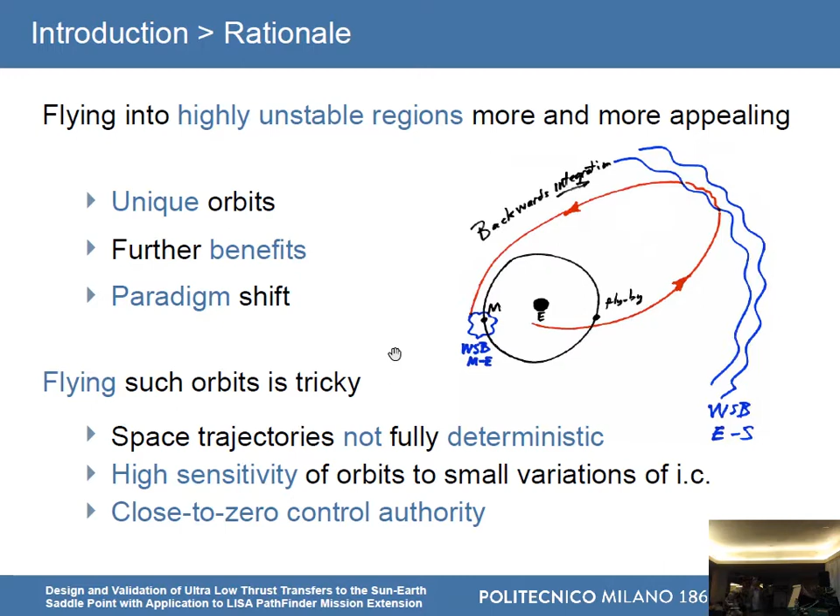Moreover, these kind of orbits are highly sensitive to small variations in initial condition, by definition, because they use a highly nonlinear dynamics. And as we will see in a second, in the present case, we had close to zero control authority, which means that we had very, very little control capability of our system. In this framework, there was a recent interest toward the saddle point.

A saddle point is a point where the net gravitational acceleration between a couple of primaries, for instance, the Sun and a planet, balance. This point has not to be confused with the Lagrange point, because in the Lagrange point you have a saddle point among the potential of one primary, the other primary, and the centrifugal force. In this case, it is a saddle point only in the potential given by the gravitational accelerations of two primaries. So this is not an equilibrium point. You can only perform flybys of this.

However, Lagrange points... Euler points. Excuse me? There are Euler points, not Lagrange points. Okay. Yes, the three collinear ones are Euler-Lagrange points, and the two triangular Lagrange points. Yes, thanks.

Anyway, because of their property of having zero background acceleration, they are ideal locations to perform a number of experiments. For instance, they are ideal locations to test possible deviations from general relativity. I don't want to embarrass myself talking about something I'm not expert in, but the idea that ESA wanted was to perform a test of MOND, which stands for modified Newtonian dynamics, because you need this level of acceleration.

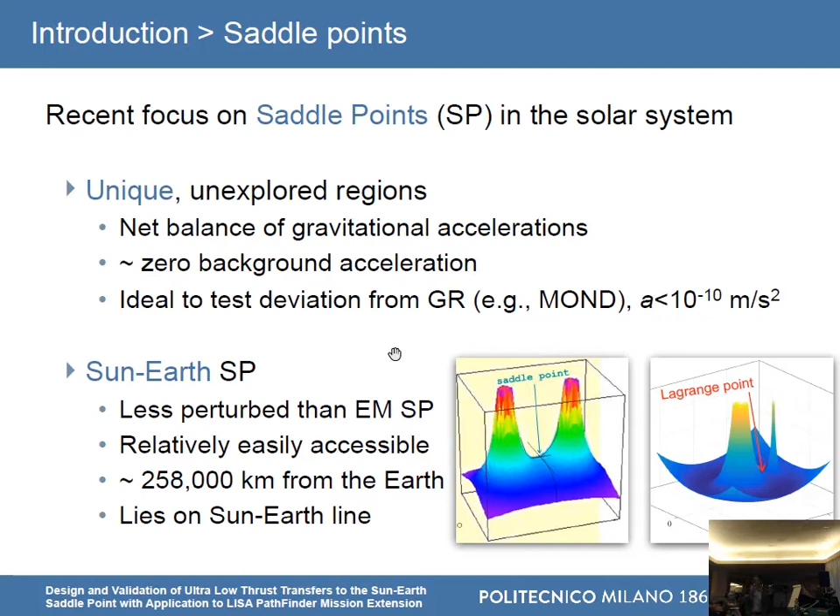For every Sun-planet system, there is one saddle point. The closest and the most reachable one is the Sun-Earth saddle point, which lies approximately 258,000 kilometers from the Earth, between the Earth and the Sun. So this means that the point is within the orbit of the Moon. To perform this kind of test, LISA Pathfinder was already in orbit until a few weeks ago, actually, and it was orbiting Sun-Earth L1 here.

The key point of LISA Pathfinder is that it has a very highly sensitive gradiometer here, made by two free-falling masses. And the idea was to use this precise accelerometer to measure the acceleration when flying through the saddle point. So the idea was, before disposing of LISA Pathfinder, to get from the Sun-Earth L1 to the Sun-Earth saddle point and perform this kind

of experiment. However, the only point is that this giant chemical module was ejected from the science module, which is this one, the yellow one, soon after the launch. And the only possible way to control the LISA Pathfinder trajectory was using these cold gas thrusters. These cold gas thrusters deliver 100 micronewtons of thrust over a 500 kilogram spacecraft, which means nothing.

The thrust to mass ratio in this case was 10 to the minus 7 meters per square second. Consider that whenever you have low thrust acceleration, usually this ratio is about 10 to the minus 4. So it's 3 orders of magnitude less than what current technology can deliver. And the total delta V budget here was around 1 meter per second. So we were performing mission analysis here with a total delta V budget of 1-2 meters per second. Usually you have kilometers per second when doing this kind of stuff.

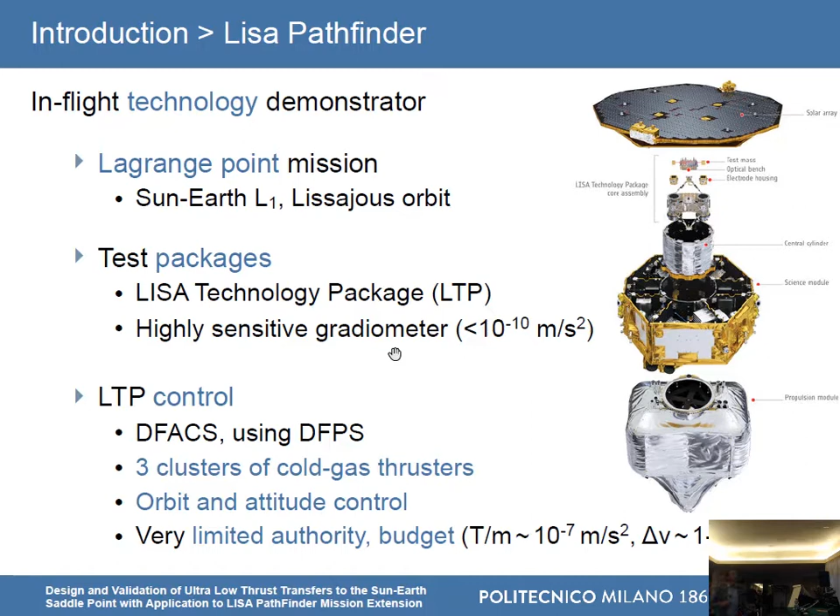So this tender was issued, and it was awarded to Politecnico di Milano and Dinamica, which is, by the way, a spin-off company of Politecnico di Milano that I co-founded a few years ago. And there were 2 parallel contracts. The other contractor was Airbus Defence and Space. The idea was to study low thrust, ultra low thrust propulsion with low delta V level with this kind of spacecraft, and how to accurately design and navigate in this region of space between L1 and L2, Sun, Earth, and Moon. This was the title of the contract.

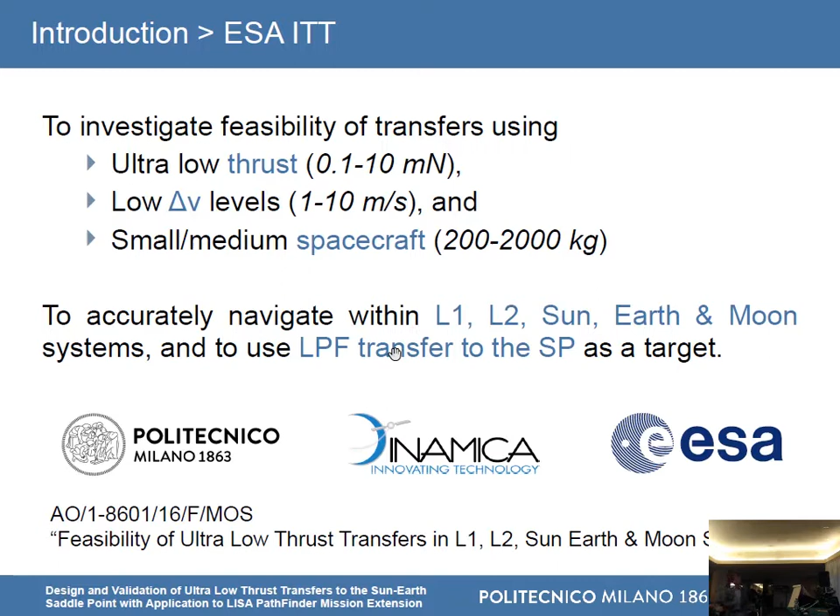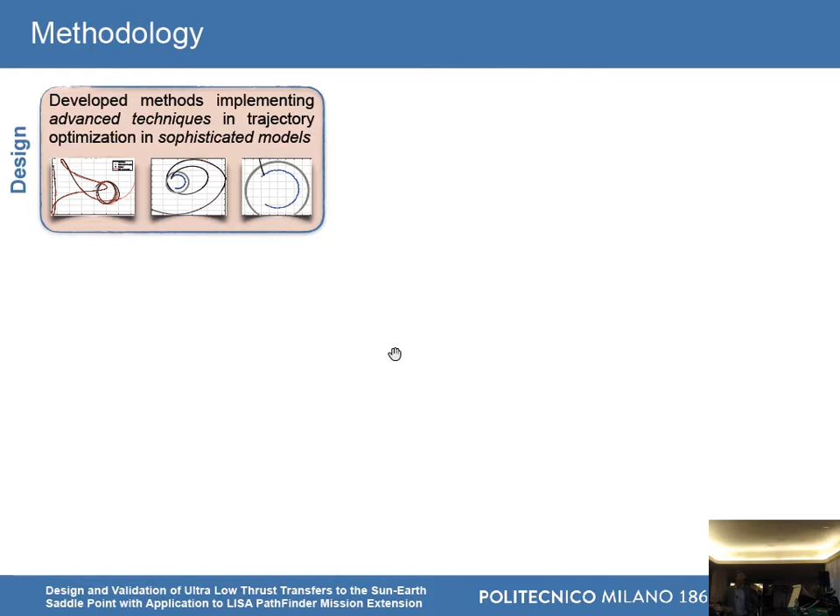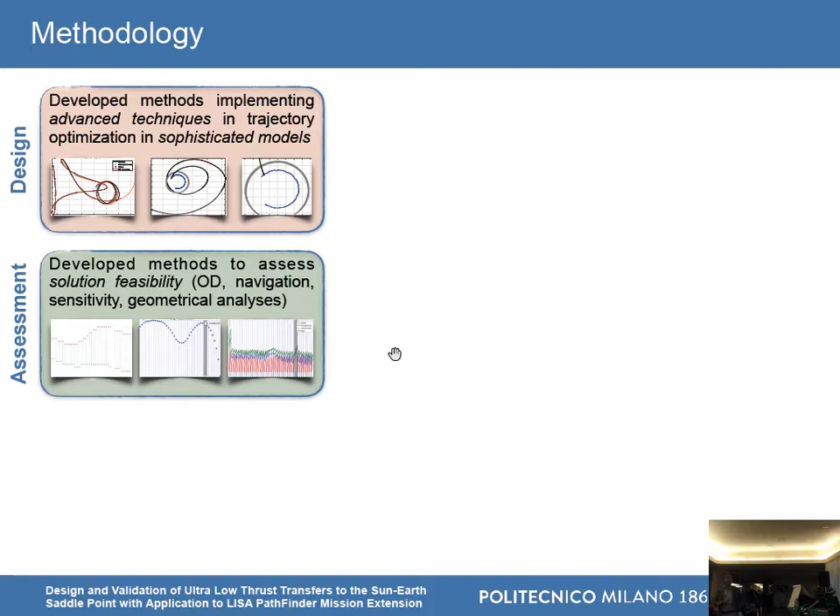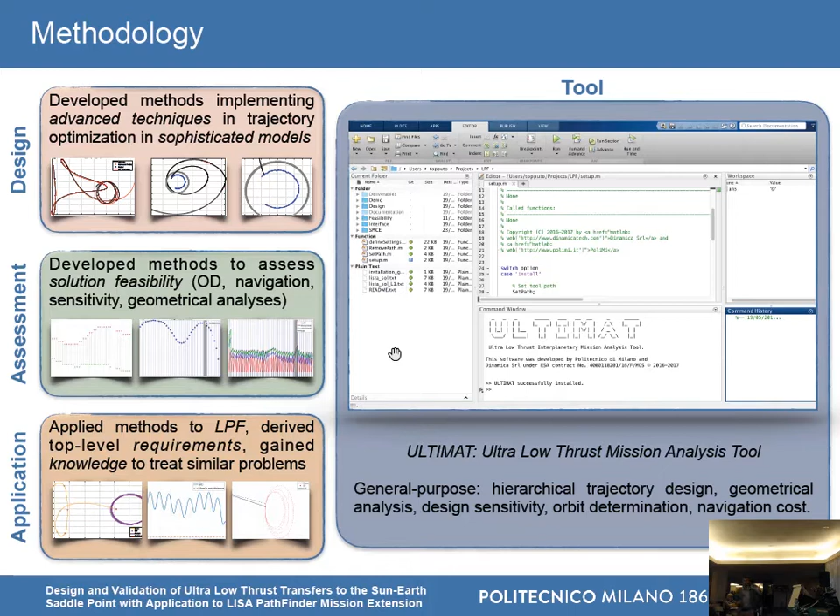So what did we do in this study? We divided the study into 3 main pillars. The first one was the design pillar, where we developed sophisticated methods to design this kind of transfers to the saddle point. Then there was a big part, which unfortunately I'm not talking about today, that was about the assessment, how we implemented navigation, orbit determination, sensitivity analysis, and so on, to validate the feasibility of this kind of transfer. And the third pillar was the application to LISA Pathfinder. As a byproduct of all of this, we ended up developing a general purpose software that does all of this. It's called the Ultra Low Thrust Mission Analysis tool, and it was delivered to ESA last week.

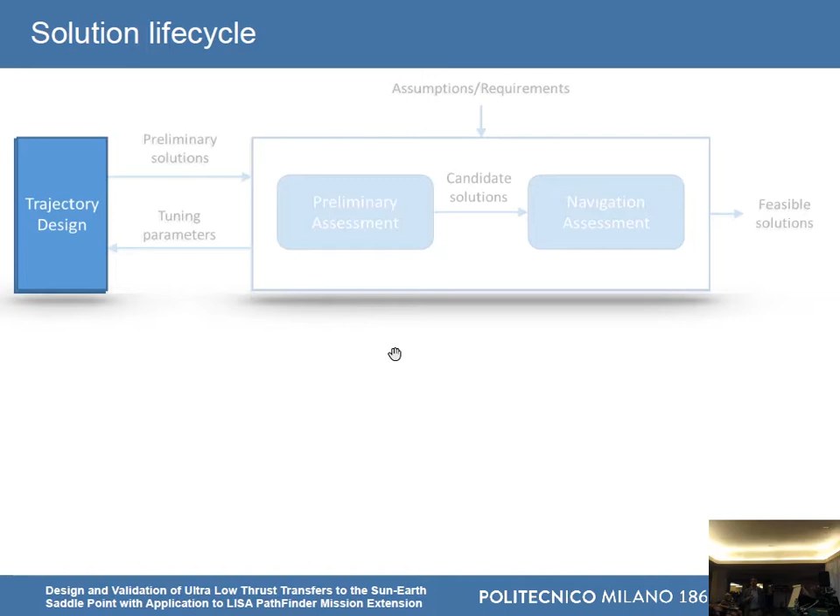So the solution life cycle here was to design the trajectories and have the preliminary solution. After the preliminary solution, perform a preliminary assessment, geometric and sensitivity analysis, to have candidate solutions, and then to accurately perform navigation analysis and navigation cost on these solutions to have what we call feasible solutions. Because of lack of time, I'm only talking about this block here, the trajectory design, which itself was subdivided into 4 more phases: exploration, optimization, finite-burn, and refinement.

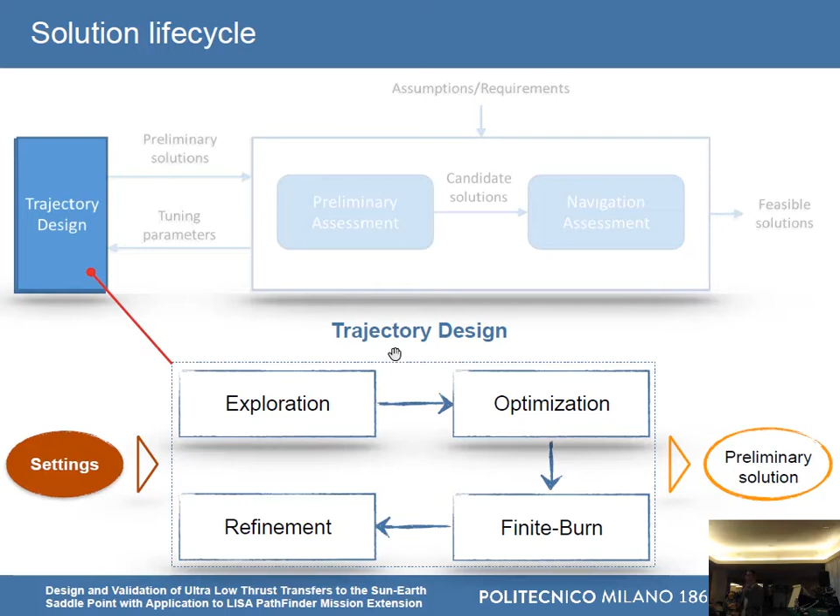Here we are talking about orbits that need to fly through the saddle point with high precision. The requirement was to hit a bubble centered at the saddle point with radius 50 kilometers. So the requirement was very high, therefore the modeling has been very accurate. The model that we used was our own implementation of the roto-pulsating restricted n-body problem. In this model we have the Sun, all of the planets, and our Moon, the planets with their barycenter.

Moreover, we have the solar radiation pressure and the J2, and this model is written in a frame that rotates with the Sun and the Earth, not uniformly, because in the real n-body problem this is not the case, and also pulsates to adjust the distances. This model was tested with NASA's GMAT with very nice results, and it's a full ephemeris model, therefore the positions of the planets are extracted from SPICE. So these are the equations of motion. Rho is the spacecraft state. C is a transformation matrix. K is a scaling factor, and tau is the independent variable here.

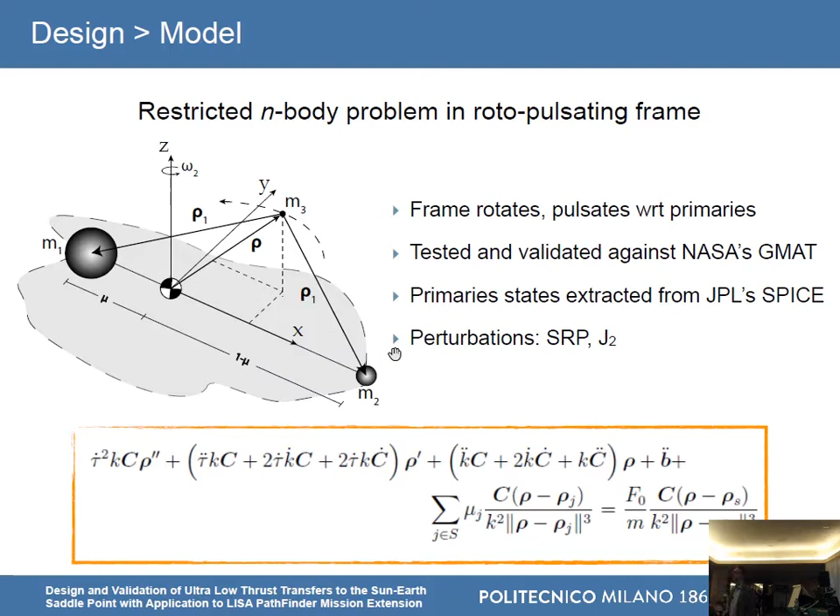In the exploration, the initial idea was to get familiarity with this kind of problem. So we performed a direct numerical simulation campaign to get familiarity with the problem and to understand the dynamics. So the problem is to go from this orbit. This is the Earth here at around 1. At 0 you have the Sun, and this is the equivalent of the orbit where LISA Pathfinder was. And we had to go from this orbit to this point here, which is the saddle point.

Okay, so we performed, as I said, a numerical simulation campaign, and by varying the out-of-plane amplitude of the Lagrange point orbit, the departure phase on the orbit, and the initial phase of the Moon, we were checking the saddle point miss distance, the time at saddle point passage, the number of lunar gravity assists, if any, the minimum distance with the Moon, and the time of the lunar gravity assist.

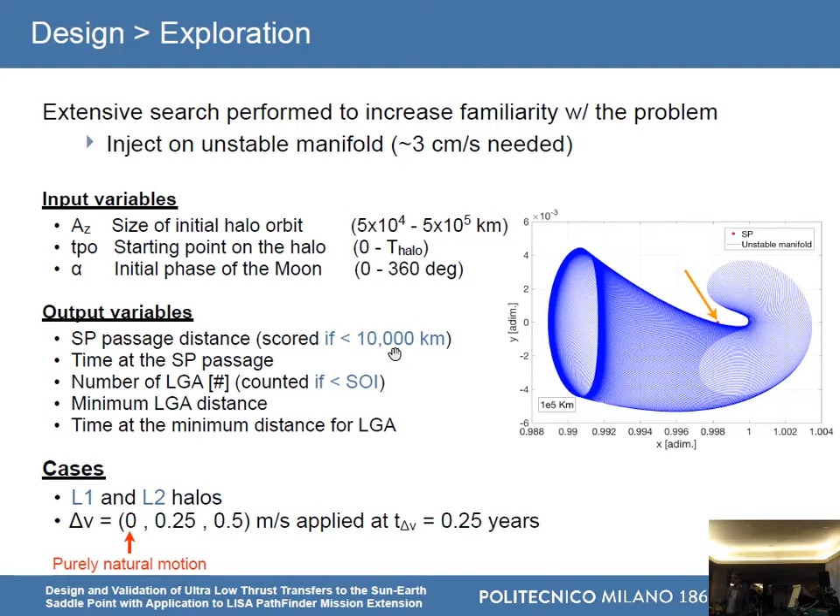This is because here we were already using the instability associated with this kind of orbit, because with only 3 centimeters per second you can inject the spacecraft toward the unstable manifold associated with the L1 orbit. And we were doing a number of cases. The most important one was to see if with 0 delta V, with 0 deterministic delta V here, we could reach the saddle point. So we performed a number of simulations.

Of course, here we have no time to show the results of a 1-year contract work, but here I'm showing one out of the 6 cases. For what concerns L1 and 0 delta V, we try to summarize the results in this scatter plot, in which you can see the correlation between the 3 input variables, out-of-plane amplitude, initial epoch, and time on the periodic orbit, and the output variables, which are minimum saddle point distance, time at the minimum saddle point distance, number of gravity assists, minimum distance at the gravity assist, and time of this.

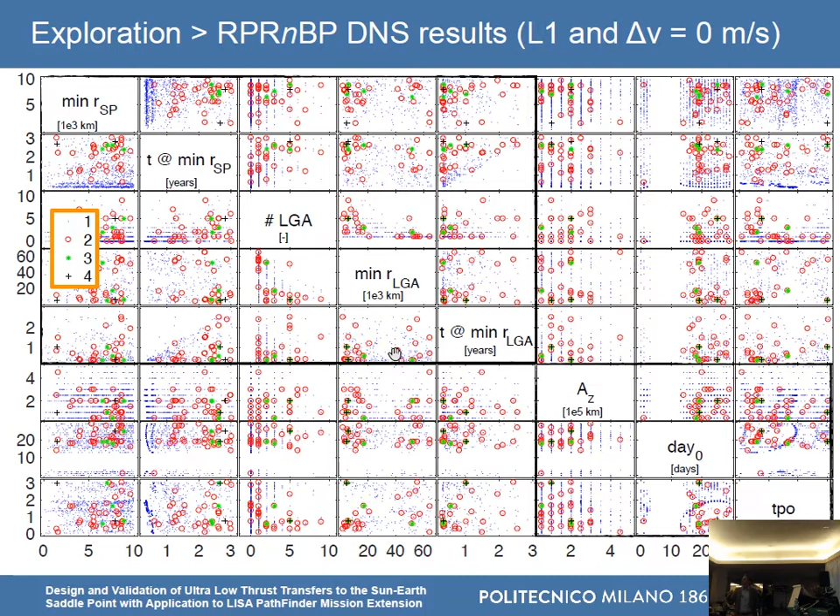And here the color code is that blue is 1 saddle point passage, red is 2 saddle point passages, and so on. This is because ESA wanted to perform 2 saddle point passages to avoid false positives. So here we can see a number of features. For instance, that many short-term solutions exist, less than 1 year to reach the saddle point. If you want to, of course, perform 2 saddle point passages, you need to wait a little bit more.

Many lunar gravity assists are not as important, because even with 0 lunar gravity assists you can get there. Of course, if you want to get 2 or 3 passages, you also need to account for a number of lunar gravity assists, but this is not strictly required. The solutions are spread all over the distances, because at the beginning we thought that you would need a very close passage to the Moon. This was not the case. What is important is to get the perturbation of the Moon, but not a strong deviation of the orbit.

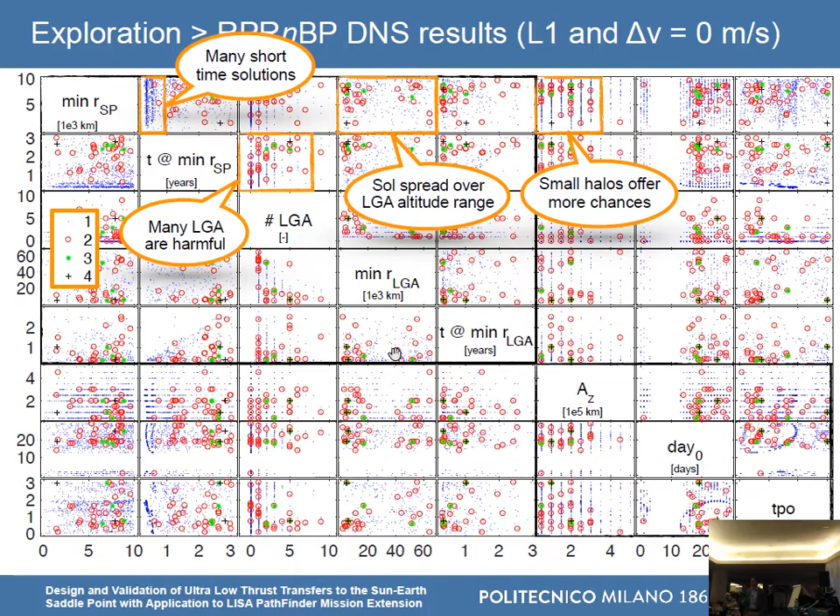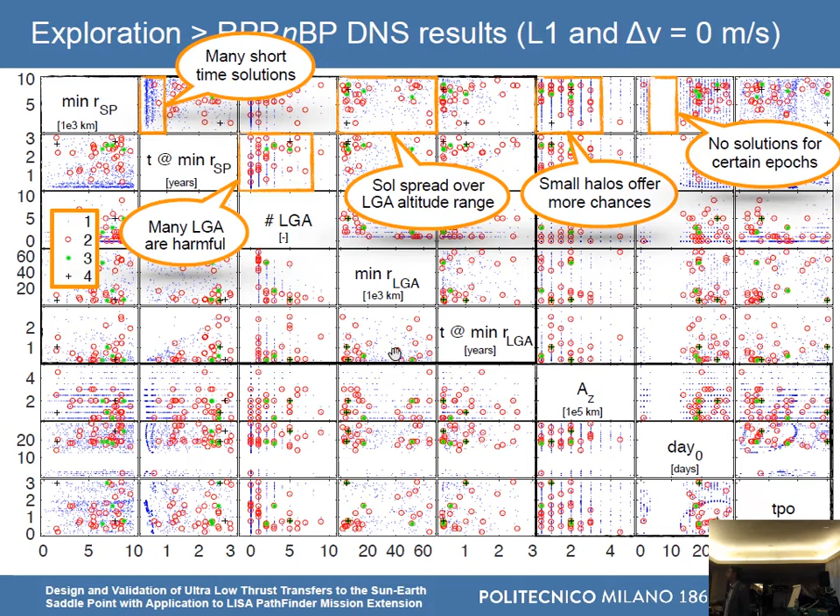And this is important because small halos, AZ is the out-of-plane amplitude. Small out-of-plane amplitude is better, because the less out-of-plane motion you have, the more chances you have to get to the saddle point, because by definition the saddle point lies in the ecliptic plane. And so on. The departure epoch, here we have a hole. The departure epoch plays a role, especially when you couple it with the phase on the departure orbit and the phase of the Moon. So you cannot arbitrarily leave this orbit at any time you want.

We performed this campaign in the circular restricted 3-body problem, restricted 4-body problem, and roto-pulsating restricted n-body problem. And we saw that the Moon perturbation enables some multi-saddle point passages that were not there, and also increases the chances to have a passage to the saddle point. In general, in a high fidelity model, passage to the saddle point is a little bit less likely than in the 4-body problem.

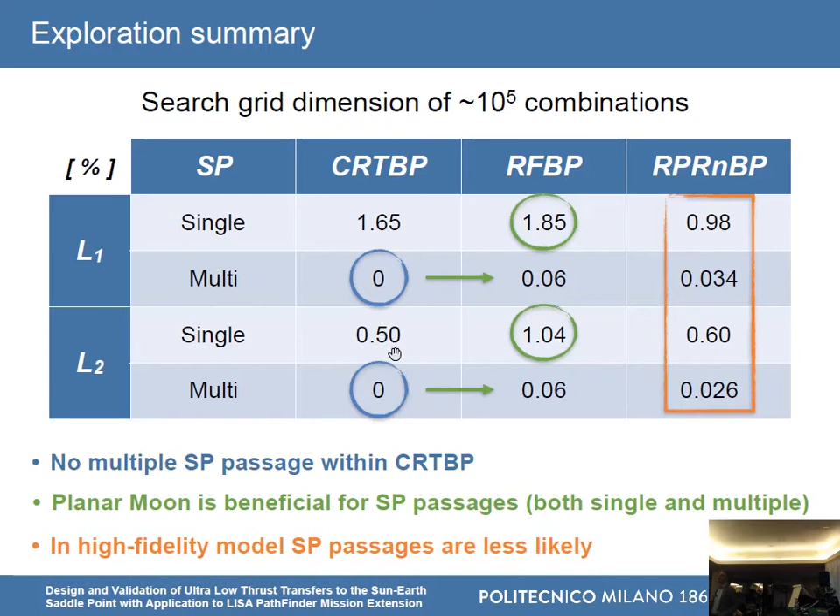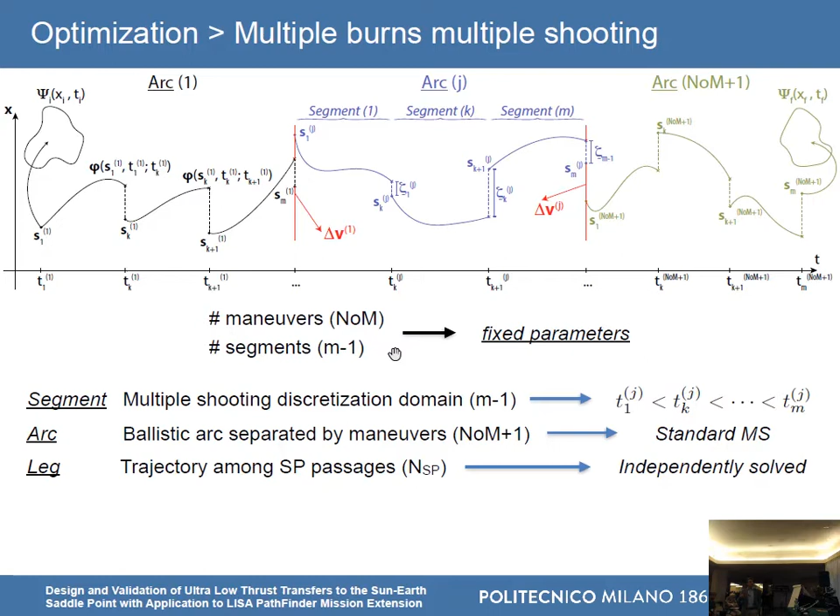So these were solutions that only passed through the saddle point with less than 10,000 kilometers distance, but the requirement was to hit the saddle point with many orders of magnitude less. So what we did, we used this as a preliminary solution, and then we ran a full trajectory optimization algorithm. So we implemented multiple burns, multiple arcs, multiple shooting, and we had a number of maneuvers divided into segments and so on. This was transcribed with the variables that are the states at each node and the times.

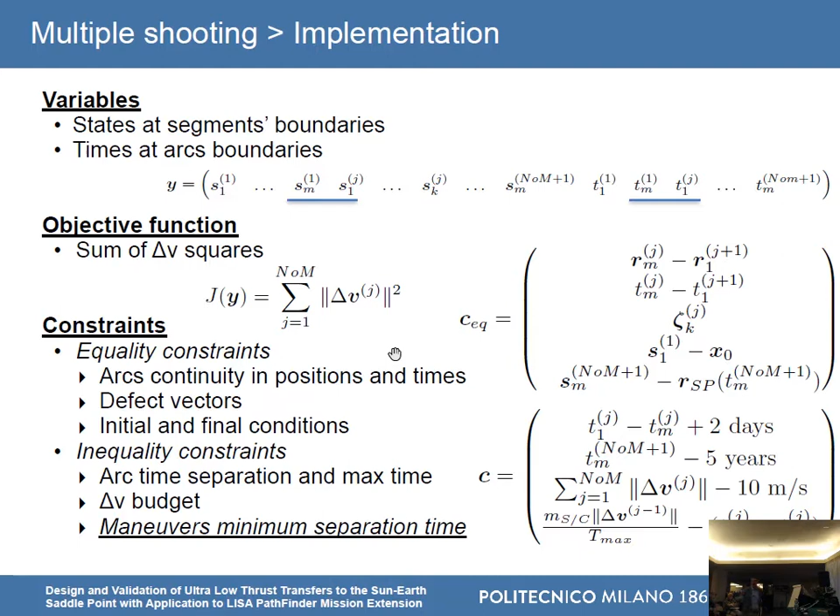The objective function was the square of the delta V, and then we had a number of equality and inequality constraints. Worth mentioning is the last inequality constraint, which accounts for the time needed to spread the delta V over a finite-burn arc, because this was already accounting for the next phase. These are examples of solutions from here. These are two passages from here.

You have a number of arcs here, and you have first and second passage. Here is another two-passage solution, but in any case, the delta V was already high, 7 and 9 meters per second in this case. So because of this ultra-low thrust propulsion, 1 meter per second can be done with this kind of thrust to mass relation by thrusting for almost 6 days. Okay, so impulses are not accurate enough in this kind of model, so we need to spread the delta V into a finite-burn maneuver.

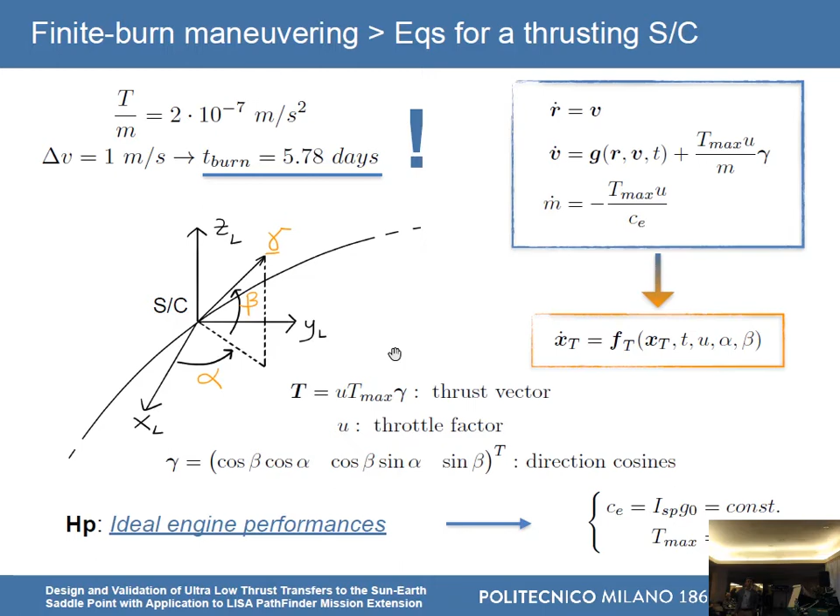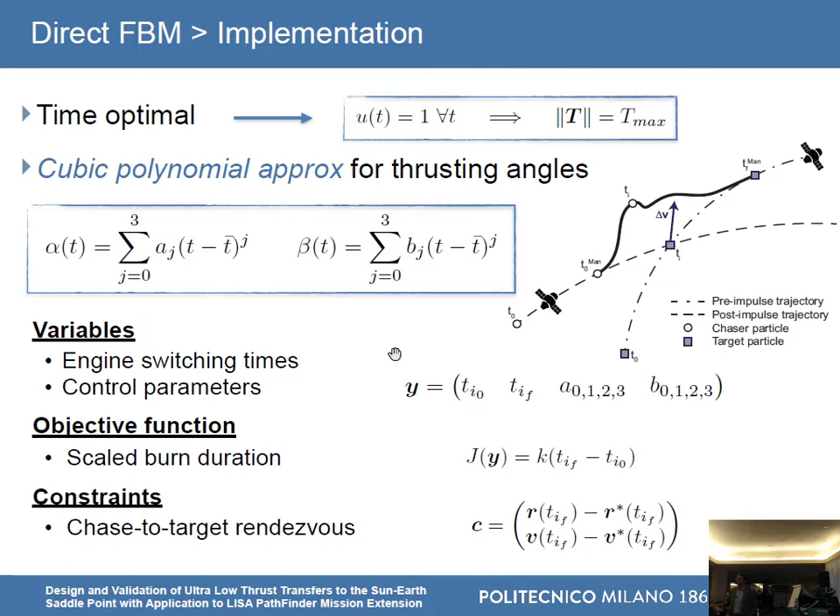So we have this continuous thrust formulation where you have T maximum, throttle factor, thrust pointing angle, and the spacecraft mass, and also in this case you have to account for mass variation of the spacecraft. If this is the orbit before the impulse and this is the orbit after the impulse, the idea was to find the initial time here and the final time there, and a certain thrust pointing history such that if you start thrusting here, at some point you will get the same orbit as in the post-impulse case. And this was a problem of finding 2 times and 4 times 2 coefficients, because we used third-order polynomial representation of this. And these are finite-burn solutions.

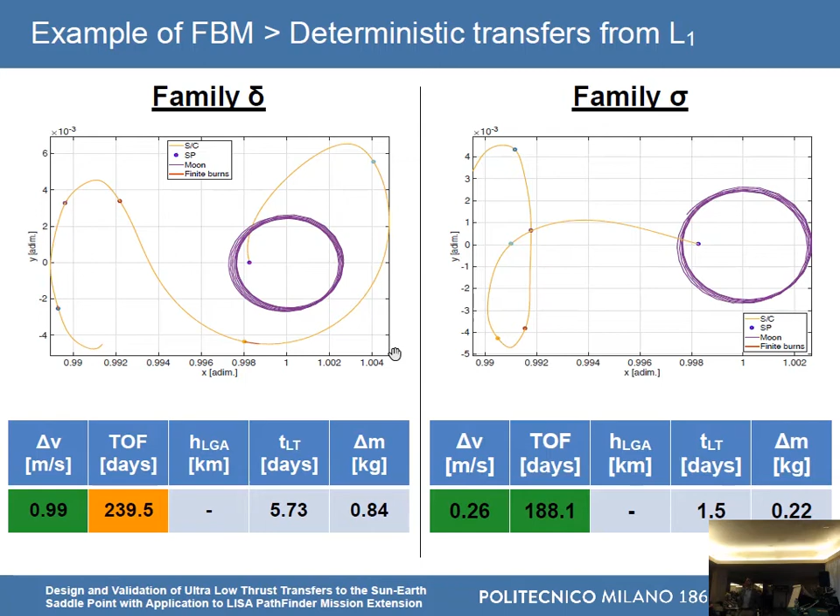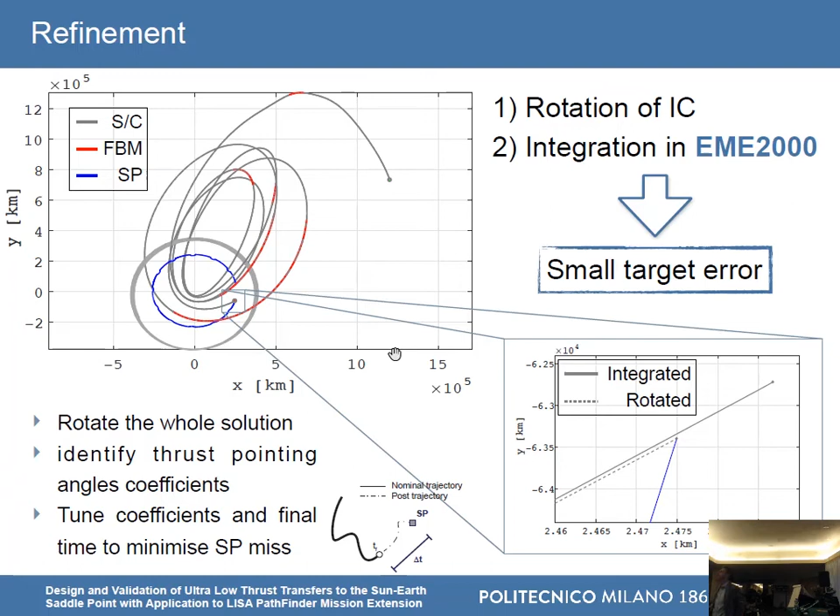So we implemented another module called Refinement, because for implementation issues we had to do all of this in the EME2000 frame, but when rotating the initial condition with a slightly different right-hand side, which models the same effects, the saddle point was missed a little bit, so we performed an identification and a tuning of the angles to get a precise hitting. Out of all of the direct numeric simulations that we ran, we found 39% of solutions which are good candidates, and from L1 and from L2 only 10% of solutions.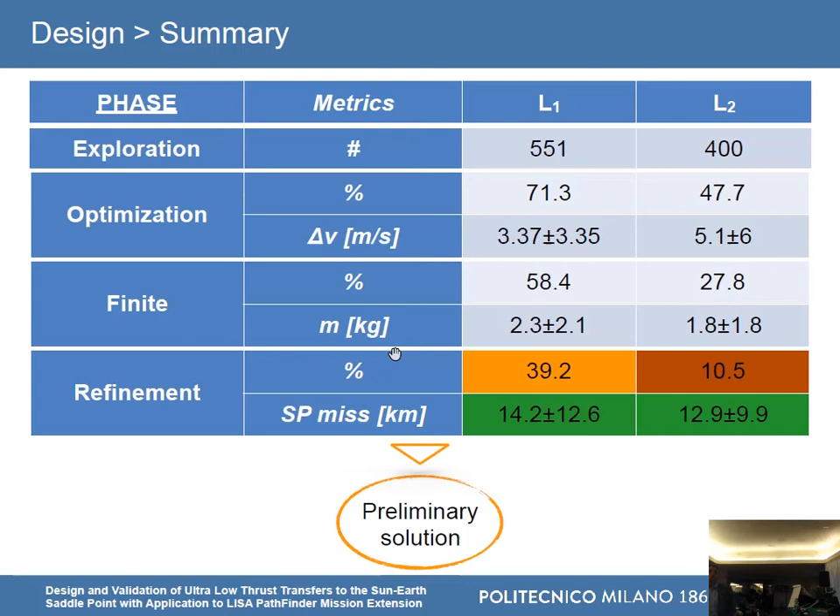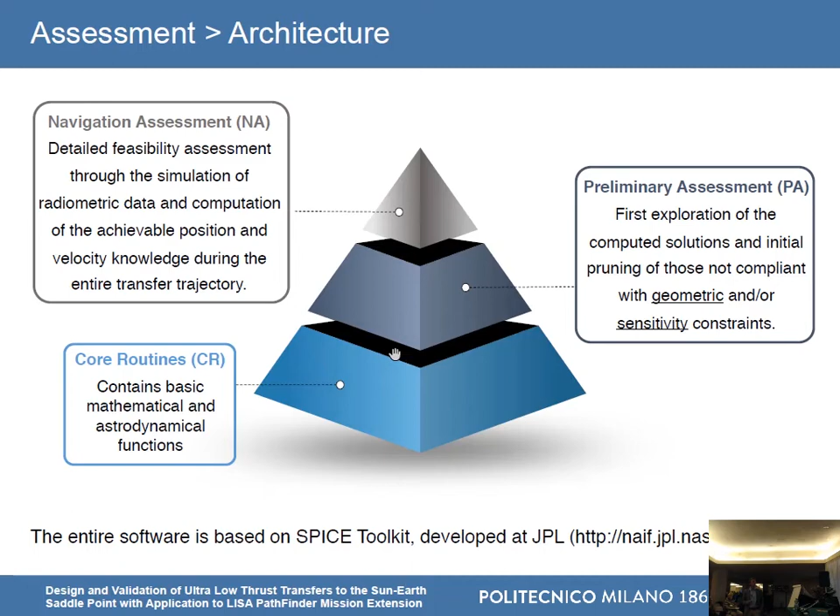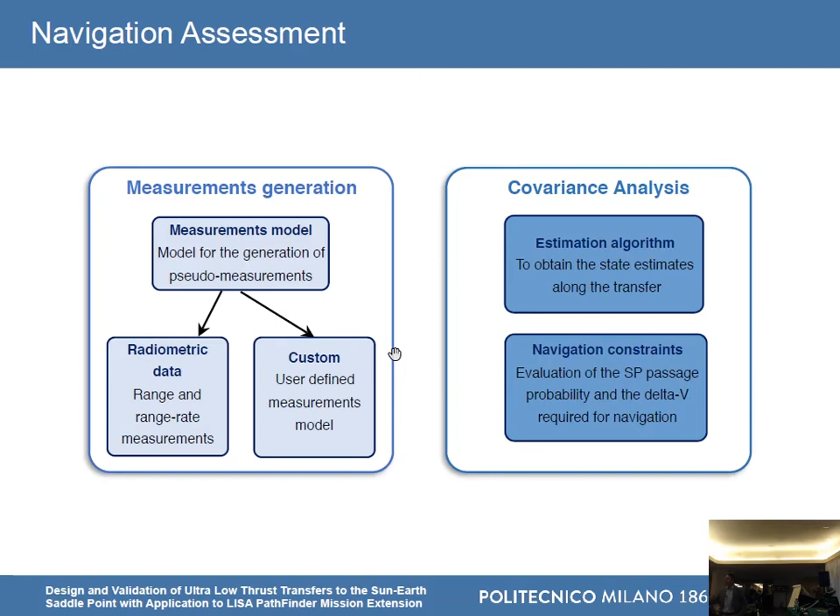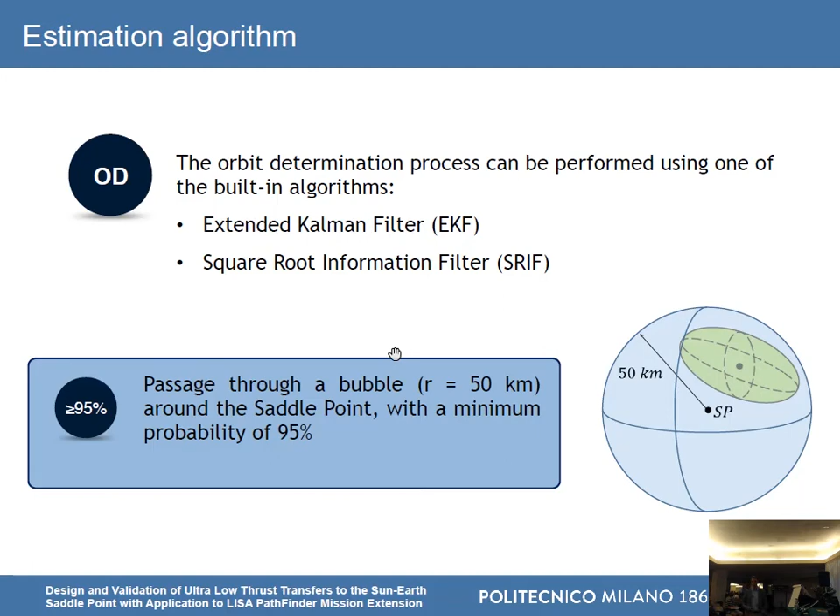Then we had another big block of work, which I'm not presenting unfortunately because of lack of time, but the idea was to assess the feasibility of this. So we implemented knowledge analysis, sensitivity analysis, to understand also how much it costs to navigate on this kind of orbits. After the knowledge analysis, this was your nominal state, this is your dispersion here, this is the saddle point, and this is a sphere of radius 50 kilometers. The transfer is feasible because this is a 95% ellipsoid probability. If this is inside the sphere, then it means that it is feasible, and this is what we did.

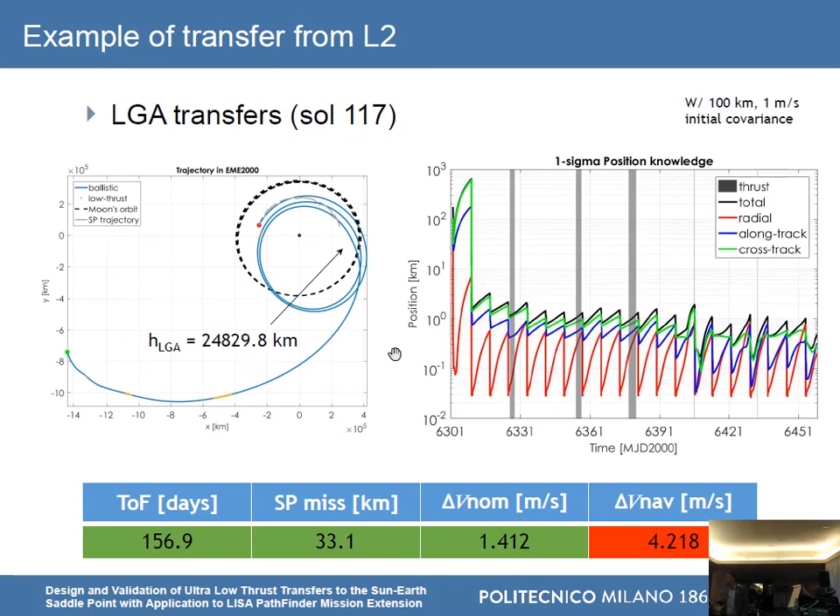So this is the knowledge analysis. This is how the position knowledge evolves when you have the transfer. These are the thrust arcs, and whenever you see the lines that go down, it means that there is a measurement done by the ground station. So we also implemented the radiometric measurements and the orbit determination cycle.

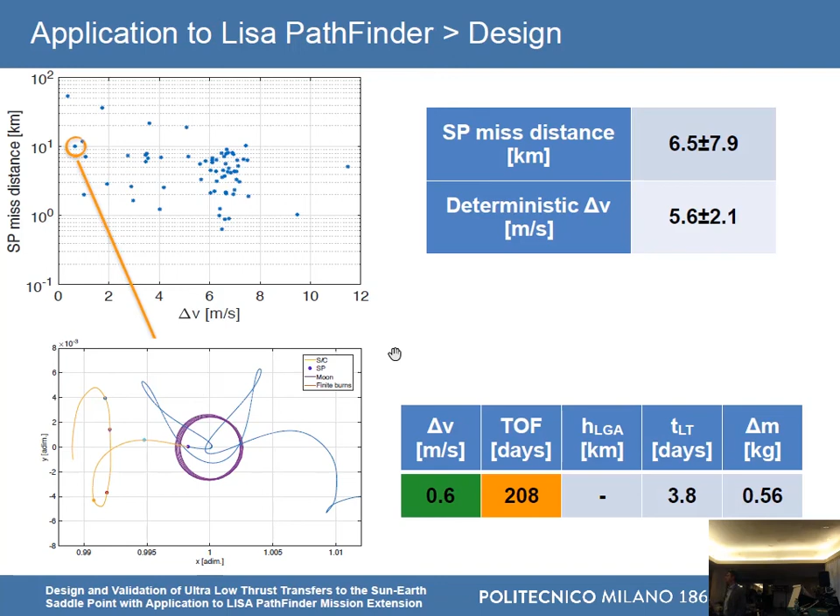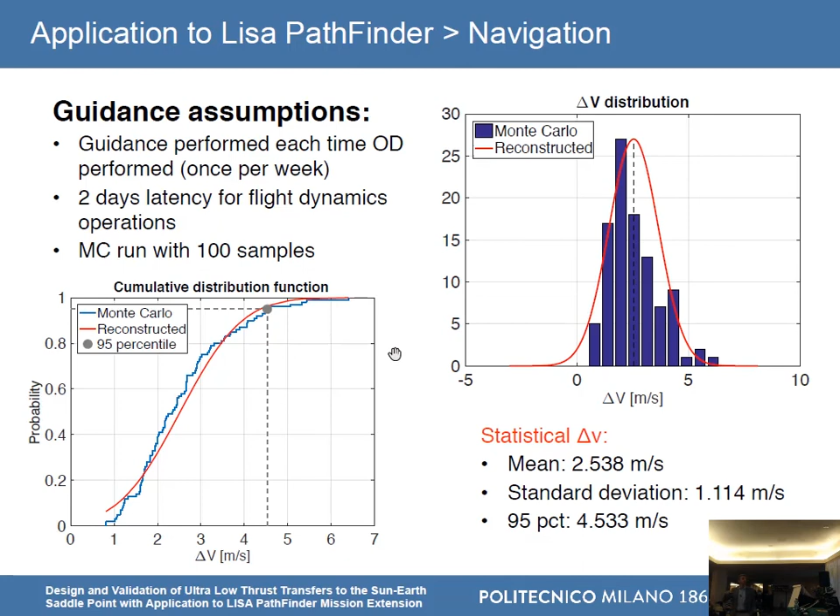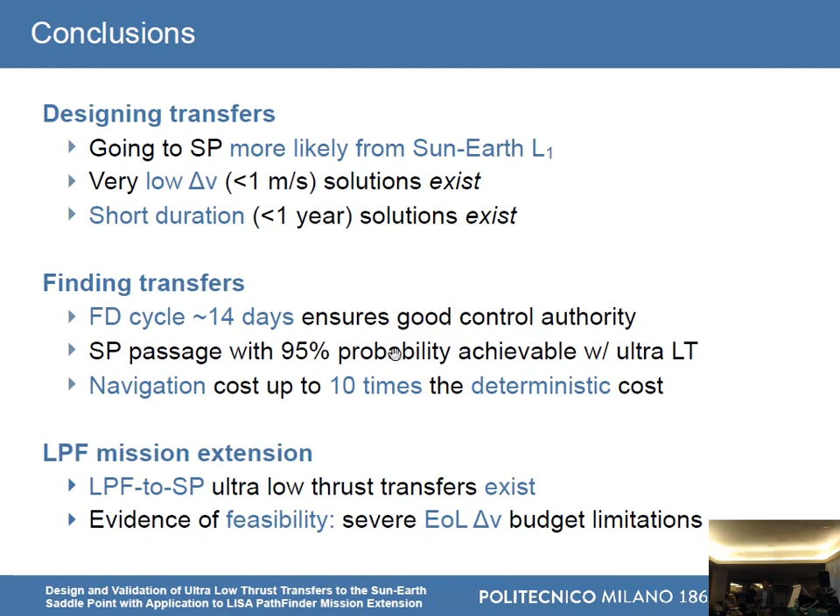And in conclusion, what we found is that going to the Sun-Earth saddle point is more likely from L1. This is, we thought, due to geometrical reasons, because the saddle point is already close to L1. Very low delta V exists, and very short duration transfers exist. For what concerns flight dynamics, there are a number of considerations, and also there was evidence of feasibility of these Pathfinder transfers.